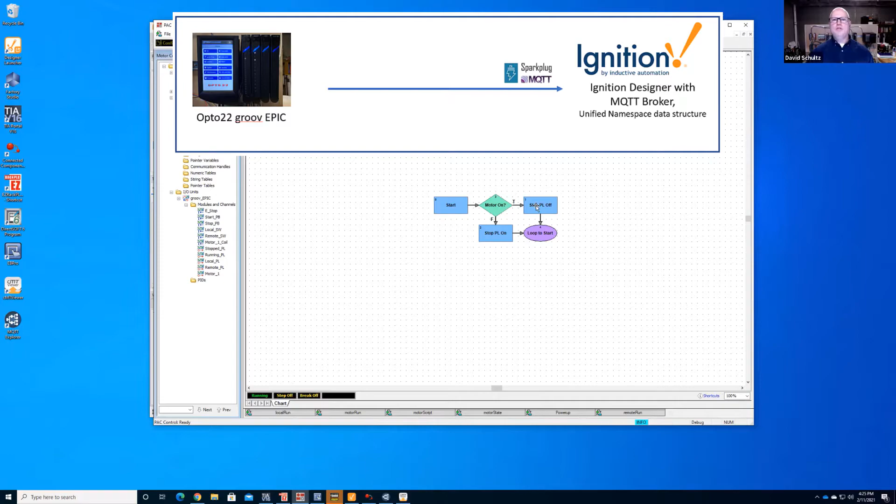Doing very well, there's a lot of good stuff going on. What have you been thinking about with Walker and all these other topics? Yeah, the Discord is almost getting to the point where it's hard to keep up with everything. A lot of good conversation, and it's almost like whoa, slow down. I was learning at a good pace, and now it's just a little crazy. I gave up a little while ago.

Right, right. One of the things I found really useful, and I think we're going to get into it here, is that for the group of people we've been working with more locally, Dan, Andrew, Mario, Dwayne, you, John, and myself, there's been a lot of learning from people with their own special areas, their niche focus. We've been learning a lot from each other, and I think that's what we're doing here with you too, where you bring a lot to the table creating demonstrations to illustrate not only the technology, but the high level concepts, the principles, the best practices we should be looking to execute in these IoT strategies and solutions.

Absolutely, and it's just a great learning experience, finding myself in a whole lot of new areas I never was in before. And a lot of it's that I couldn't, it's not like the information wasn't there, it's that someone says this is what you need to know in order to do this and focus on it. Otherwise I have no idea even where to start. So, which is cool, I like the direction.

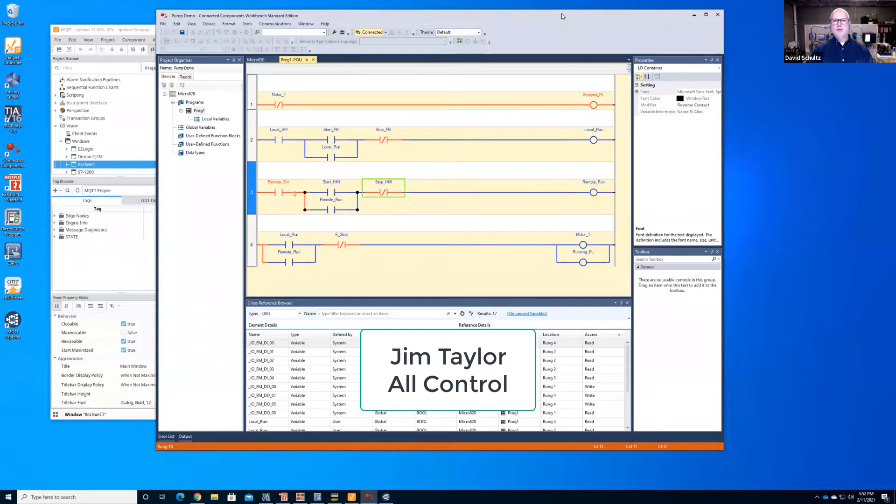He's just been extremely helpful in getting some of the stuff done. I'll explain why when we get there, because a lot of your logic control is pretty straightforward, but once you get into how they do it with their strategies and their charts, it's a little bit different. But once you understand it, it's like, oh, this is pretty cool.

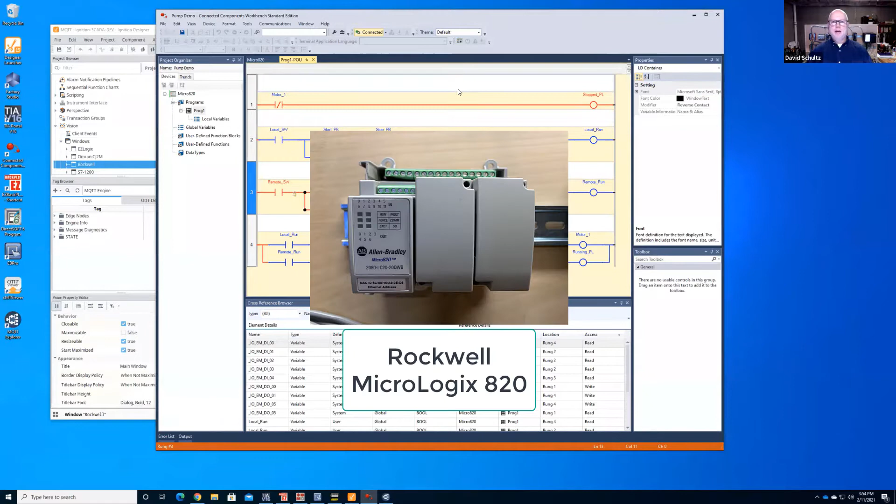So I've started here - this is a Micrologix 820. What I'm doing with this is I'm actually running a Kepware instance over here, so I'm bringing all the tags in through Kepware - it's an OPC UA server. I show this for a couple of reasons: one, there's a lot of people that use OPC and Kepware for getting tags out of their PLCs. So that's how I'm able to connect down to it.

I also want to show it because while I'm going to be publishing everything into an MQTT broker, I want to be very clear that control still needs to be at that OPC UA or directly with that hardware itself. While yes, you can do control with MQTT, it's really not recommended. I just want to be clear on that.

The other reason why I'm using Kepware is they have this neat thing called an IoT Gateway - that's actually what we're looking at, an IoT Gateway. So these are the tags that I've actually brought in. We're going from that Micrologix 820, bringing it into Kepware for publishing back out using the Kepware IoT Gateway. I'm going to get these tags publishing real fast.

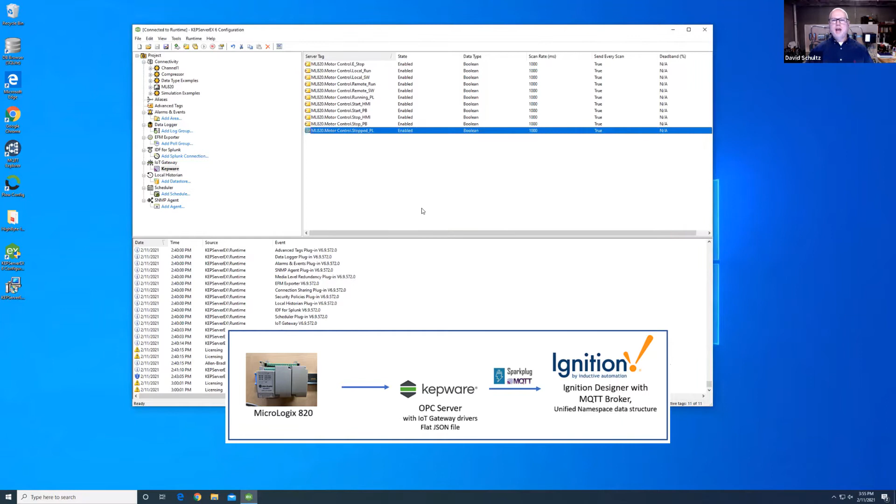What this IoT Gateway does is publish in a flat JSON. It'll take all of this information and give you the tag name, the quality, the value, and whether it's good or not. I'll show you what that looks like over here when I'm publishing it. So I'll just do a little Kepware update - now you can see here's the tag, the value, whether it's on or off, true or false, and of course the time that it came through. So you can see exactly that we are publishing all these.

I'll turn this off real fast just so we don't continue to update all that information. So now, again, it's report by exception - we're only going to publish data changes, only bringing in the data that changes through there.

So what I'm showing you here is that when you actually look at the tag that's coming in - this is coming from my fictitious Highland plant. Now it's just bringing in this utilities, compressors, and here's the motor. Let me expand this out a little bit - you can see this is a pretty good sized JSON payload that's coming through, and that's the timestamp.

So what I'm doing is bringing it in, running a Python script on this Kepware update, and anytime something changes, you'll get a tag update entry. Not as elegant as some other solutions I'll show you, but the idea is you can at least get this value published inside a unified namespace.

Again, coming down, you have your enterprise, your site, you get into the area, kind of a line, and what we're on here is just a motor in this particular case. So just one way of doing it, bringing in data, trying to make it available, and it's absolutely doable utilizing that solution.

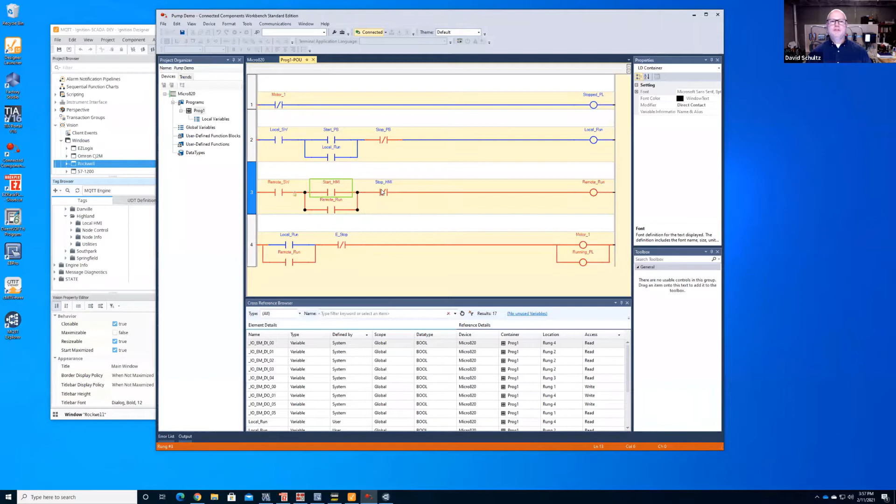So any questions on that? Oh, I guess I should show you that we can actually run this thing and turn the pump on and turn it off. So pretty slick - it's actually working.

So yeah, let me throw in a few thoughts if you don't mind. Sure. So summarizing, a Micrologix 820, and then grabbing that data with Kepware, and then sending that data to an IoT gateway.

And where was that IoT gateway again? It wasn't clear to me where it is. Is it in Kepware? It's in Kepware. And that Kepware is then publishing the flat JSON to Ignition.

So you see a lot of those tags disappeared when I just click the refresh. That's just because this is the most recent data that we have. But you can see it turned it on, it turned some stuff off, and what the status of everything is. So you can see all that.

And again, it's nice that all of a sudden, through just a JSON, you can actually keep track of how often a motor cycled through, or did a compressor start and stop, those types of things, and you get those times. You know the exact tag, on or off, and anytime it changes, this will publish that data out to the broker, and you can subscribe to it and have that data.

And so I have a couple other questions, and I want to be conscious of time so this video isn't too long for everybody. How many other samples do you have, so I know what level of questions to ask here? In terms of samples, what do you mean? Like you said, this is sample number one. I have five. Okay, are they all kind of similar to this, or are they a whole lot different?

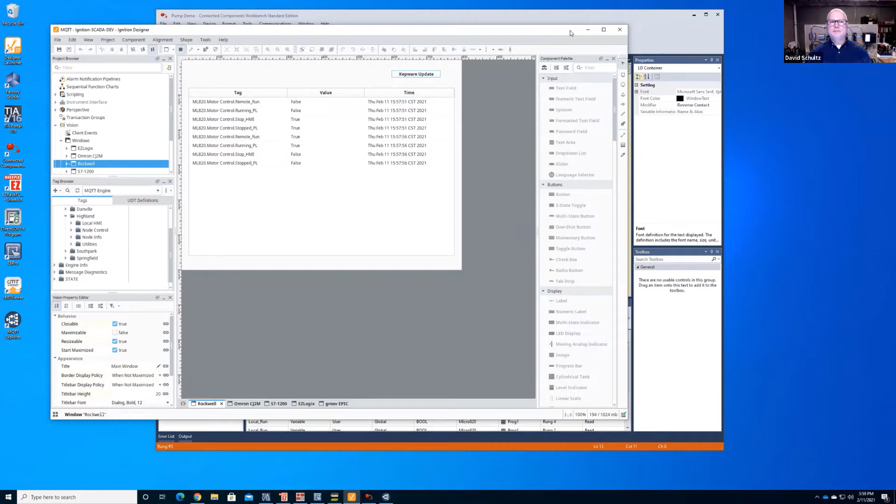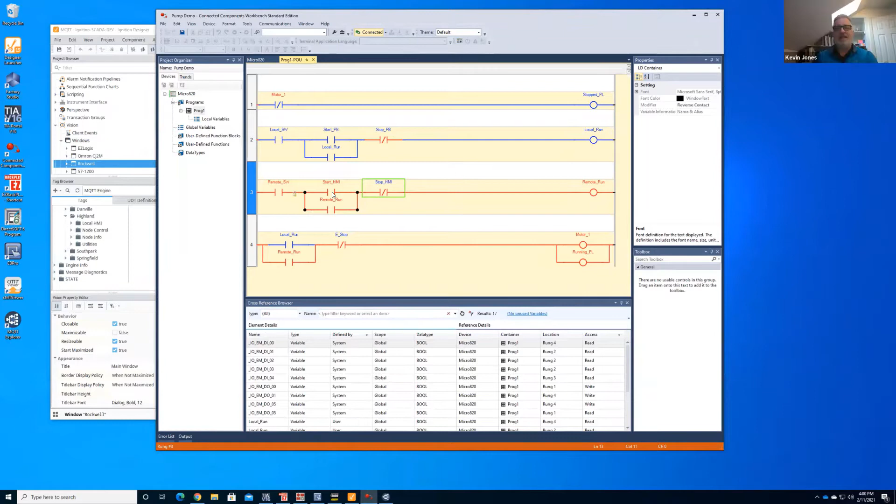Okay, so it's how. But then the overriding principle is using these principles we have around lightweight, report by exception, open technology, and of course there's always a fourth - edge driven. Thank you. And we execute using those as some of the ground rules for putting these solutions together.

Okay, all right, I'll leave more detailed questions for some other time. No worries. So let's go on to number two.

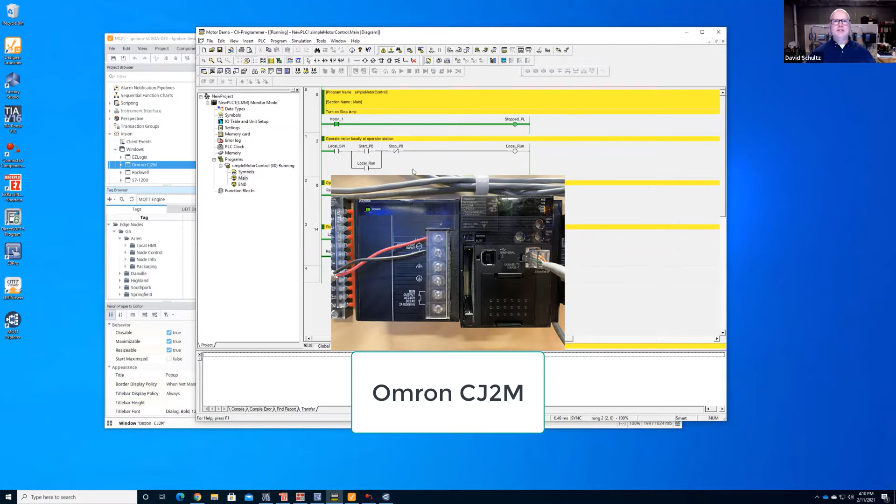So the second one we're going to look at here, Kevin, is I'm using an Omron CJ2M. This is a workhorse PLC from the Omron family, and you'll see it's got the exact same logic structure to it. So the first thing it does is the motor - if it's running or not running, it'll say that the stopped pilot light comes on.

I have the ability to do local and remote, and then of course there's the seal-in circuits that get everything to go. So you can see I can come in here, I can change it to where now the motor is going to be on.

Normally you would have just a push button that would do this. So the seal-in circuit now continues to run it. And if I want to turn it off, I can just set that back.

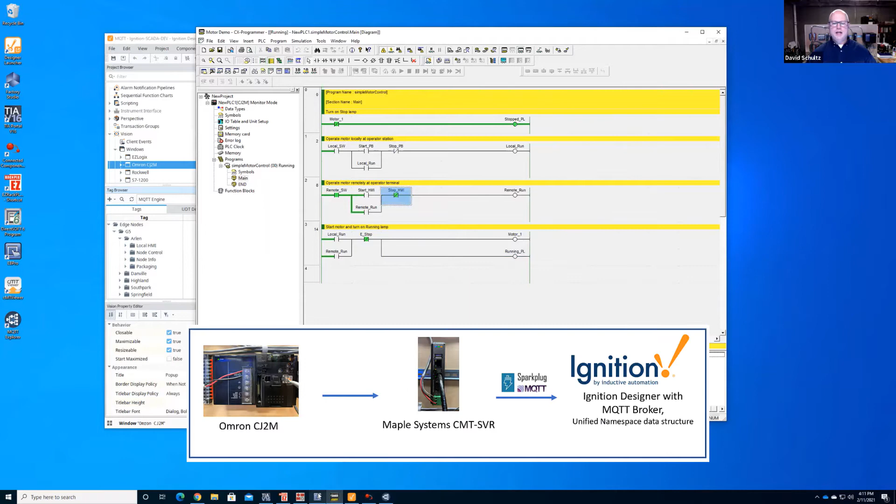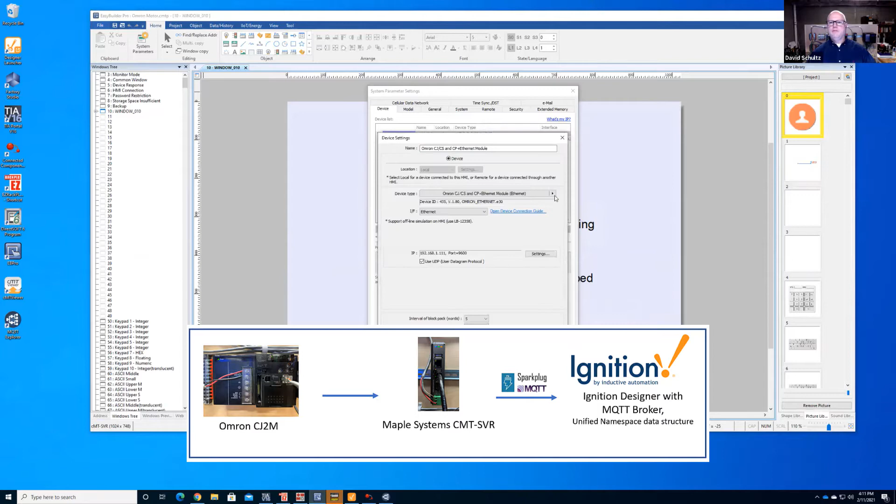What I'm going to do with this particular one is I've used a Maple Systems CMT SVR, and it has a pretty extensive list of drivers that you can use with these. So if you have a lot of old equipment, if you hit the right button, there is just a pile of drivers that it'll talk to in terms of hardware.

So again, we're going to use this Omron driver here. And then how it gets in, let's start with that first. I built a screen here that gives you some basic operations, so go ahead and do an online simulation.

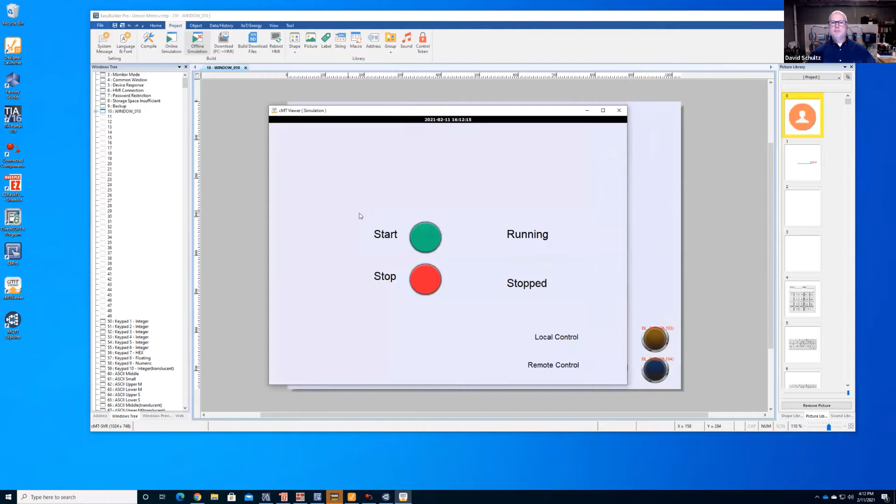As soon as that pops up, it's going to bring in all of the tags. You can see that I'm now stopped. I have the remote control, and now I can hit start, and the motor is running. It stopped. Motor stops. Pretty vanilla.

So this is a good example of using a local HMI for doing the actual control of it itself. What I was going to show you earlier was that I can also take the Maple Systems and take all those tags that are in that Omron PLC and actually publish them to MQTT.

And I'm actually using the Sparkplug-B protocol. You can see that there's all the object properties. So I'm using Sparkplug-B, sending it right to the Chariot SCADA MQTT that's right on the ignition instance that I have.

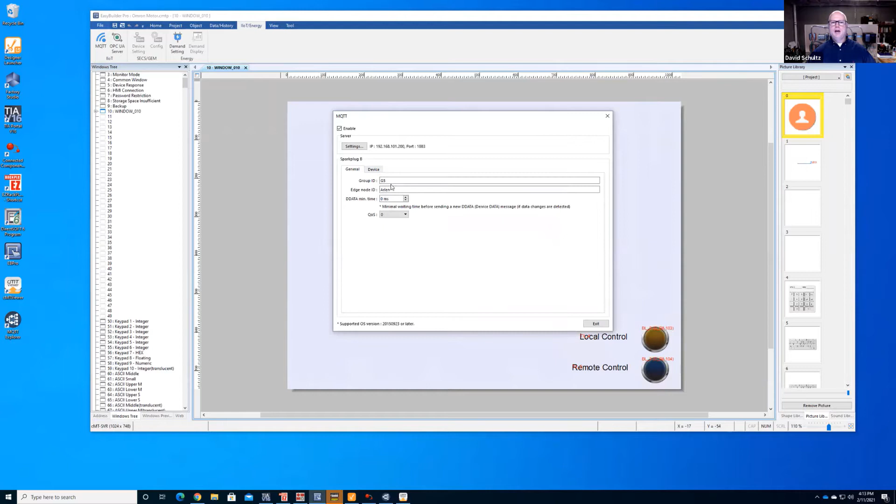And the group ID, I always use, following through the ISA 95. And then I just take all of those tags that I'm pulling from the Omron, and I'm just publishing them out there. That's all you have to do.

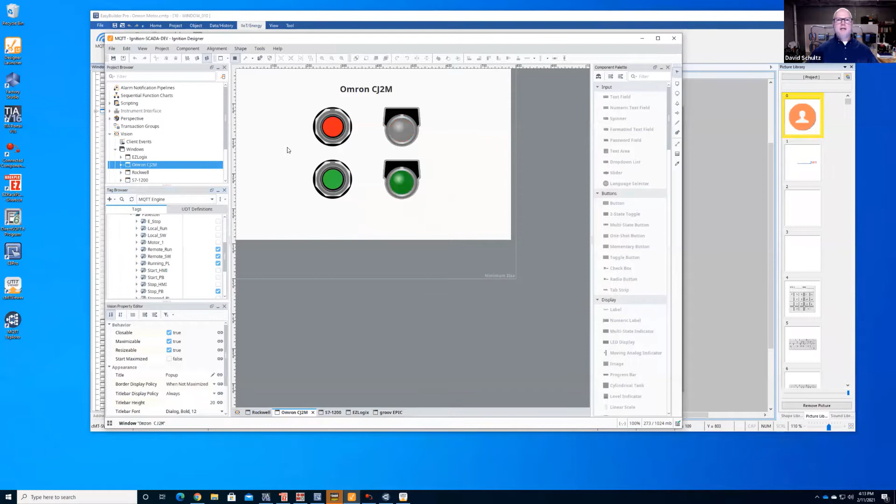So I can come over here to my ignition instance, and you can see that I have all of those tags. This is at the Arlen plant, sitting on the palletizer. I can see all those tags coming through, and I can actually go in, and even though I don't want to do control remotely, I can use that same MQTT, and I can start and stop the pump, the motor. So if you see here, I'm now running.

And if I go ahead and hit the stop, you come right back, you see that now everything is stopped. And it does keep track of every one of these.

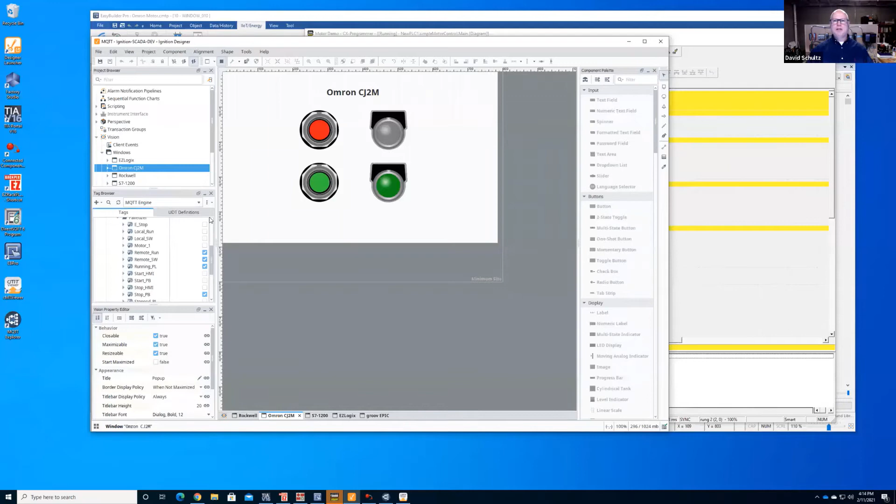So if I were to hold down the start button, you can see that I'm actually holding down that start HMI. When I release it, that tag even goes through. Some pretty neat things you can do, but you can also capture anytime somebody actually manually starts and stops it as well. So if I were to hit the actual start push button and stop push button, if it happens to be scanning at that time, I can bring that through as well.

So you're running two different HMIs, and you're controlling the one device through two different HMIs and effectively through that MQTT broker. Absolutely. Absolutely.

And the sweet thing about MQTT is it's outbound only, so I don't have to open up any ports in order to get this to work. That's just the nature of how that protocol is built. Everything is outbound only. So whenever I make a change here, my broker happens to be locally, so there would be a little bit of latency, but it'll tell it I have an update and it'll push it all the way out.

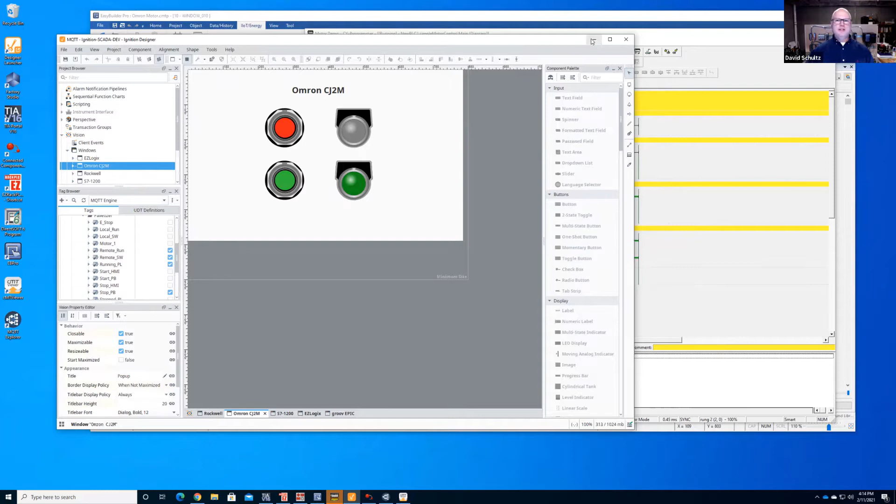Nice, nice. So of all of these, this is my favorite one, only because there's a lot of legacy equipment that Maple Systems can talk to, and I can publish it right in with Sparkplug-B. I just demonstrated this. This PLC that I'm working with has probably been in the field 25 years.

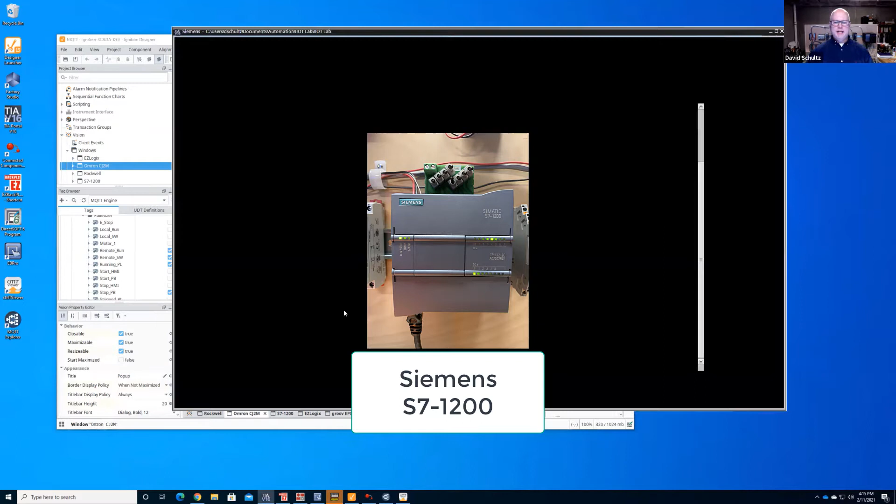So the next one I'm going to work with is a Siemens. This is a Siemens S7 1200 that I have, sitting at my Danville location. Should be a very similar setup on doing this. Right now the motor is off. I can turn on remote control.

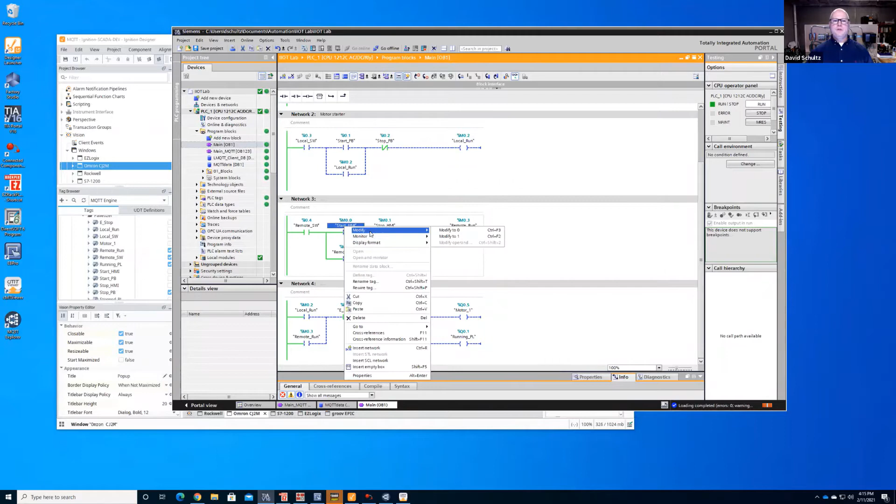I can go ahead and turn it on. So actually my PLC behind me clicked, and this would normally be just a push button. So I'd change that back, and then I can go ahead and turn everything off as well. So go ahead and get that turned back on.

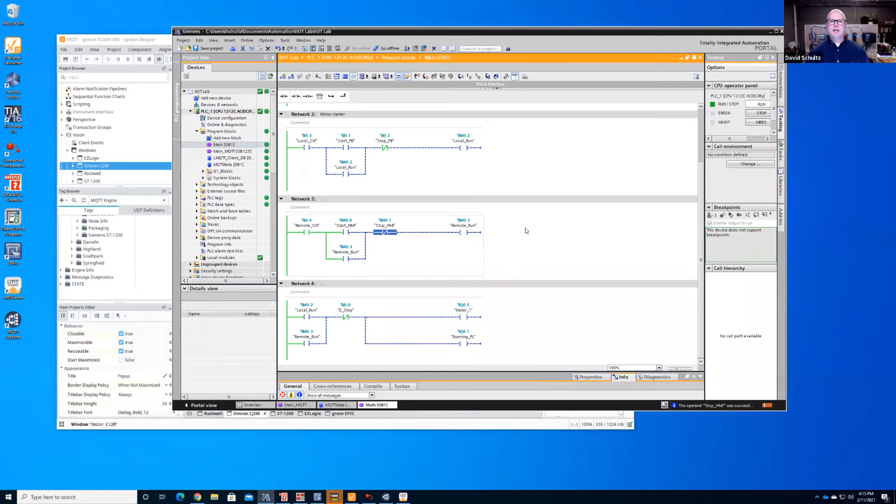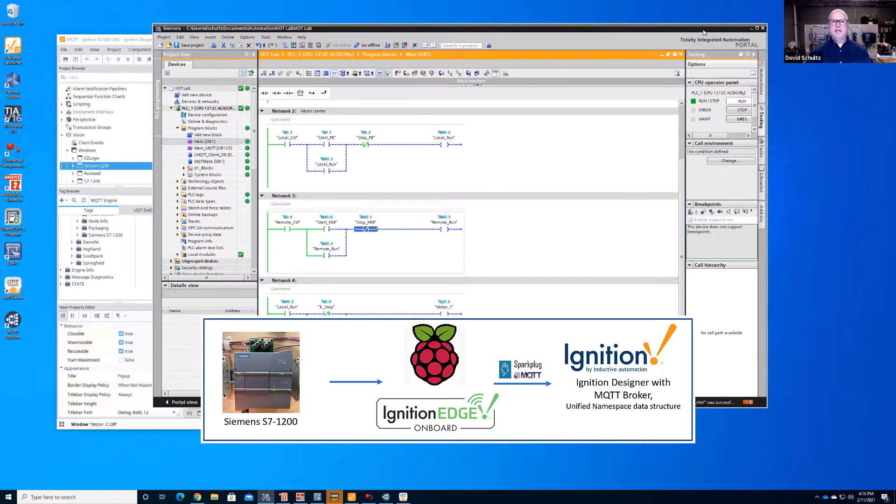So exactly the same type of thing. What I'm doing with this is I actually have an edge device, a Raspberry Pi running Ignition Edge, and I'm taking all of those tags from it and publishing that through the onboard MQTT transmitter. It's a very common way of doing these types of things, just using an edge appliance.

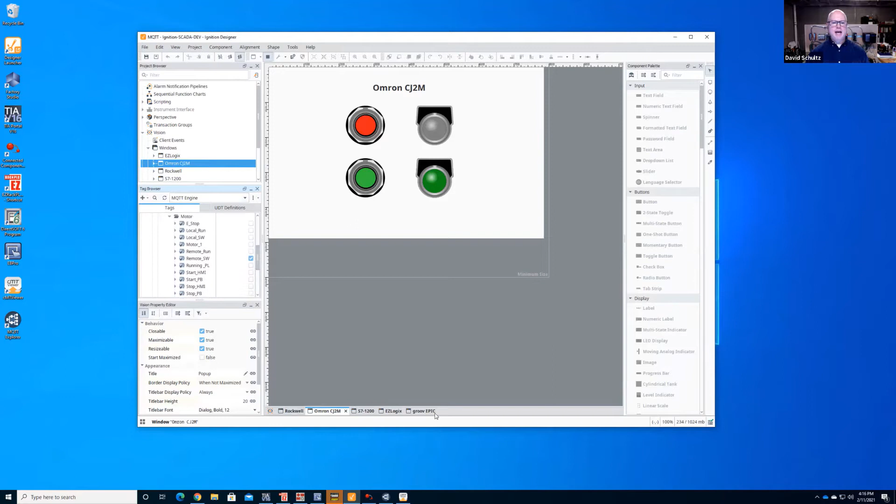You can see, just like we did in the Maple Systems, I now have all the same tags available to me, and I can do all the same motor control through there as well. So I can start it, and I can stop it, and you can see everything updates in the tags. Again, within your unified namespace, having access to all this data at one consolidated location, because all these remote locations are feeding into one area, I actually have access to all of that data going back.

So this one's pretty common in terms of just talking right to it. The S7 1200 is still a very common PLC. It's available, so there's a little more that you can do with it as well - a lot more drivers and devices that'll connect to it, not as much with say the Omron or that Micro820. The Siemens S7 does have a function block that does support MQTT.

You get 800 characters that it'll publish out, so you could go through and iterate through all your tags and build the JSON, and then you can actually publish it out, similar to what the IoT Gateway was doing in Kepware, and you can both receive on that same type of thing. But again, not as elegant as using something else. I think it's still in development, but that's available on board with the S7 1200.

So again, taking a PLC, putting it to Ignition Edge, and publishing it out via MQTT. And of course, you can develop all of the windows right there on site through that edge device as well, if that's something you need to do. So any questions on that one?

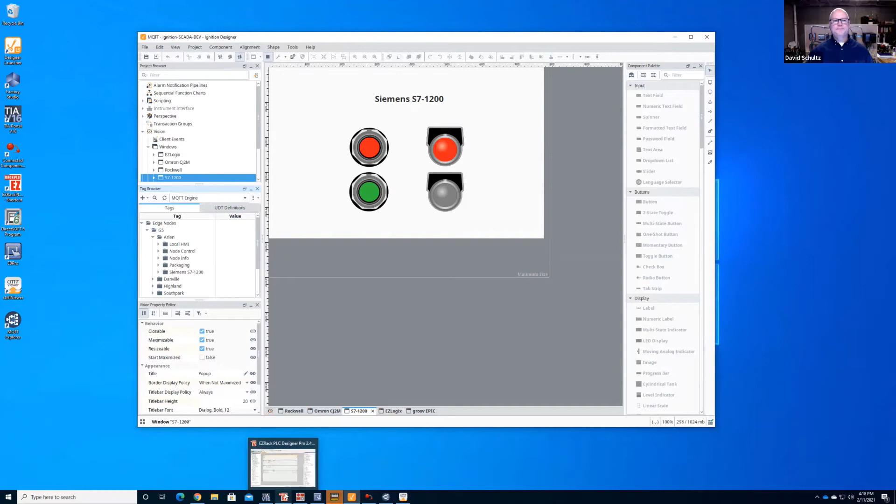No, I mean, you're repeating the same pattern in effect over and over again, just with different devices, demonstrating the different devices. So you go to Siemens S7 1200, or maybe I do have a question.

But you are also using a Raspberry Pi with Ignition Edge. So where do the two come into play as you're pushing the data out to the data broker and Ignition, and then showing that and controlling that with the HMI and Ignition?

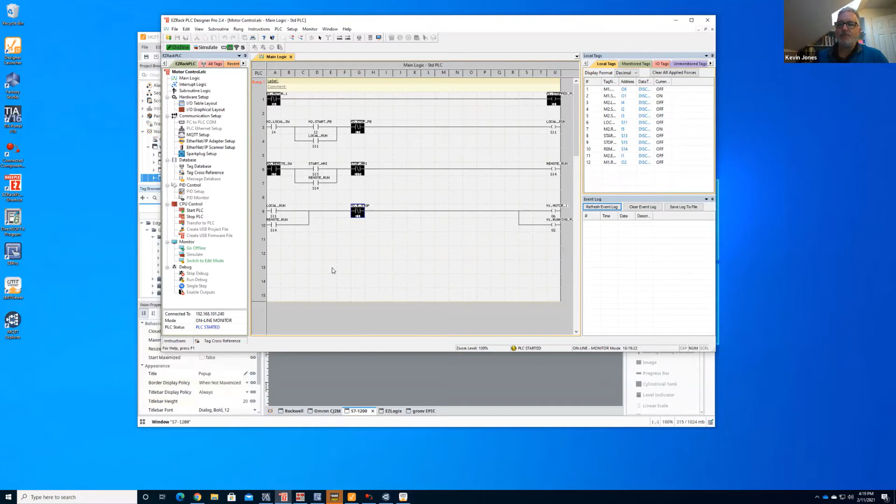So yeah, the Raspberry Pi is sitting on the same site. It's sitting right next to that S7. So architecturally speaking, it's at that remote location. I'm using a Raspberry Pi. I have the drivers within Ignition pulling the tags right out of that Siemens. And then I'm also using the MQTT transmitter and publishing those tags to an MQTT broker. So you're using the Raspberry Pi as an edge device connected to the Siemens to pull the data out of the Siemens. Yes. Yeah, thank you - that's a great clarification on that.

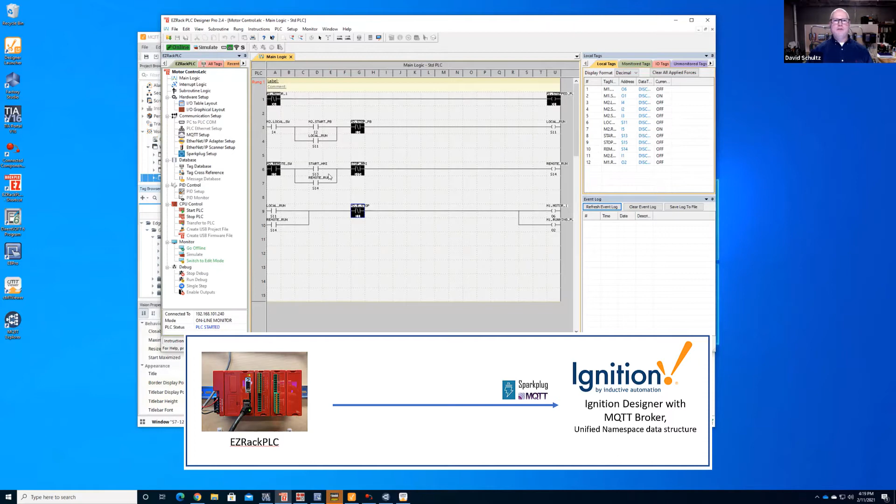So Ken, now we're looking at something that's a little different. This is definitely a piece of hardware that is Industry 4.0 ready to go, and this is an EZRackPLC, and they actually have a Sparkplug driver right on it itself. So again, Easy Logics and Easy Rack, they have both PLCs and HMIs, and you can do all the same control, there, the PLC - you need to have a local operator that's connecting through it. But what's nice, again, I don't know if I need to demonstrate the functionality.

This motor is going to do the exact same thing. But you can come right in and do your Sparkplug B setup. So you have your client ID, you give it to your unified namespace - here in the Springfield location, we're in their fermentation area. And then I set up what the brokers are, get that all set up. And then all the tags, all I have to do is publish what tags I want to do, and I can actually bring in that unified namespace exactly how it is - Tank 103 on pump 1 filling it. There's all the tags that are available to me.

So anytime I make that change, let's go over to the MQTT Broker. I can pull up the Easy Logic screen, and you can see that I can start and stop that motor. Again, the point isn't to actually do remote control for all these devices, but since I built this out properly, we're now at the Springfield location. I can come into my fermentation area, go to tank 103, go to the charge pump that's going on it, and I have all those tags available. So when I start it and stop it, it does all the same thing.

So, variation on a theme, but if you're taking a look at older technology that you'd like to replace with some new stuff, this is something you want to consider. Starting from a technology-first standpoint, we want a PLC that supports MQTT and Sparkplug B. Of course there are many other considerations, but this is something Easy Logic does automatically - you don't have to do anything with it. It's all ready to go.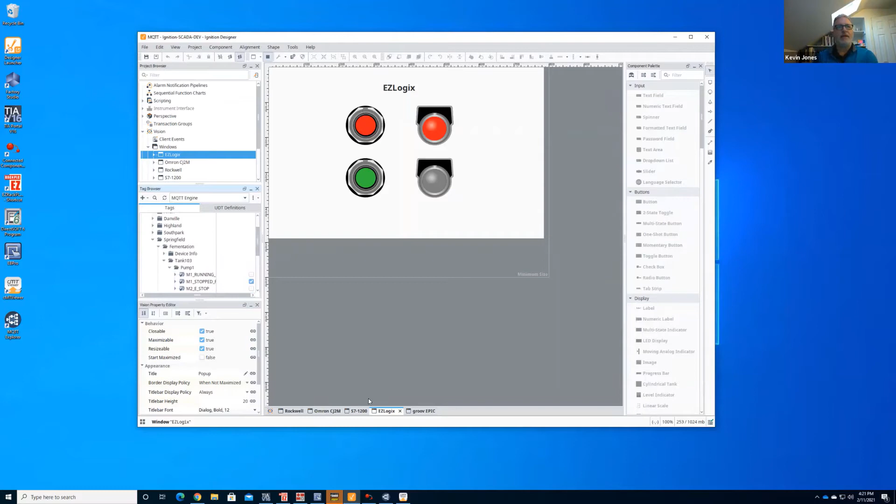So the UNS, the Unified Namespace that came out automatically, how was that created? Can you just review that? Where's the other screen you were showing? Yeah, so it's over here, when I go to my rack - the EZRack.

So when I go to my PLC setup, or my Sparkplug setup, I can bring in all the tags available to me in that PLC, and I can publish them exactly how I would want them to exist within a unified namespace, or at least how it would look in this particular instance. So where did you do this in this PLC designer, where did you set up that structure?

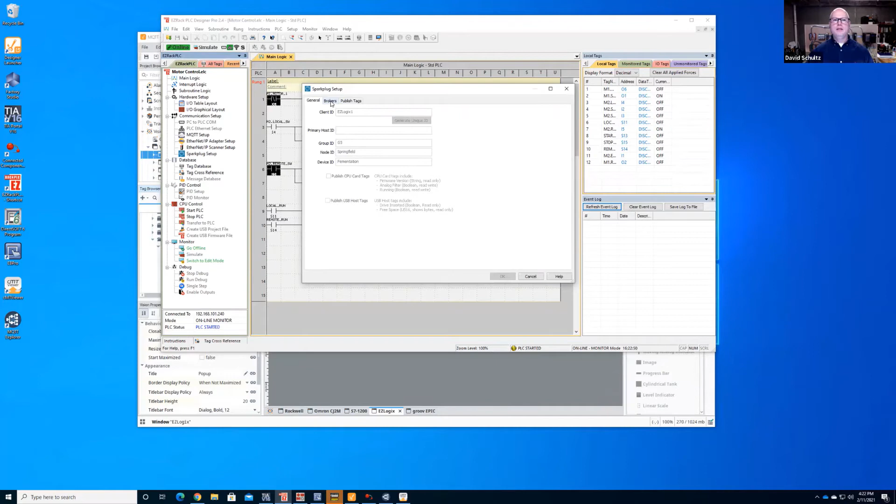So this is the development environment for the EZRack PLC, and there's one communication setup. If I go to Sparkplug B in the setup, this is where I give it the general setup - group ID, node ID, and device ID. I happen to use those three for the enterprise, site, and area. Then over where I've published the tags, it automatically fills those in, and I can even get into line and cell. So it's on tank 103 in the fermentation area, and I'm pump 1, coming into that particular tank.

That's okay. So then for each development environment, for each HMI, each development environment for the logic for the PLCs, you have to identify where you're going to put each of these components - enterprise, plant, etc. - for the UNS structure, and then put them in. It just creates it from there, and then you're pushing it.

Yeah, exactly. Now, if you were looking at a complete development environment, you might want to create your entire unified namespace for that actual location, and then just have a folder for MQTT tags, and that's where this would go. I'm really just demonstrating this to show that you can publish this data right to a unified namespace using that hierarchy that would make sense. But it's more likely you're going to build this within your plant itself and then publish that.

That's actually something we're going to take a look at in the near future - actually building one of those for a site and then publishing it into an enterprise. So we're going to take several individual MQTT clients or brokers, and publish that using a bridge connection, putting it into a cloud MQTT. Nice, great, awesome - so that's what we're going to look at.

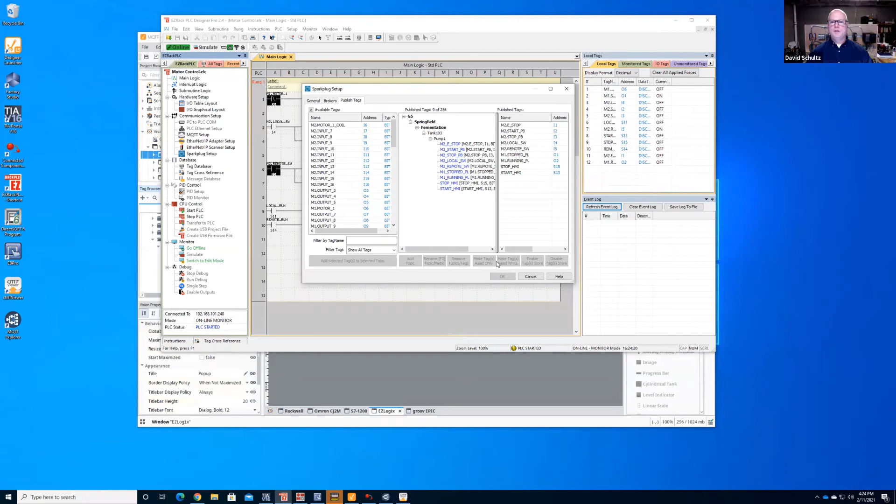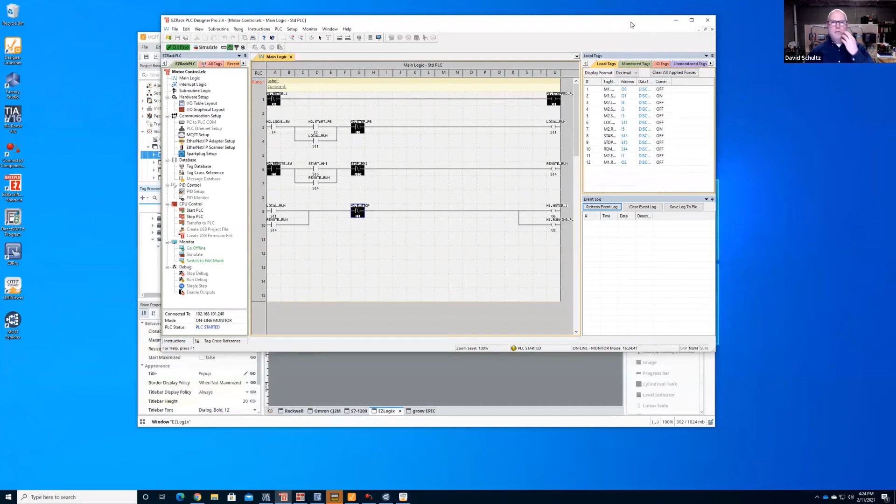So, again, just going through - we had a Rockwell PLC, put it into Kepware, went into their IoT gateway, and we just published a flat JSON. It gives us the same information. Second one we did was that Omron PLC, went into the Maple Systems SVR. We're able to do all the control there from that particular unit, as well as publish MQTT in that SparkPlug-B format, so it's available with other systems.

And then we had the Siemens S7 using a Raspberry Pi running Ignition Edge, so you can do the control right from that Edge device, and it also publishes into the MQTT broker, and you now have all that information available however you want to consume it out there.

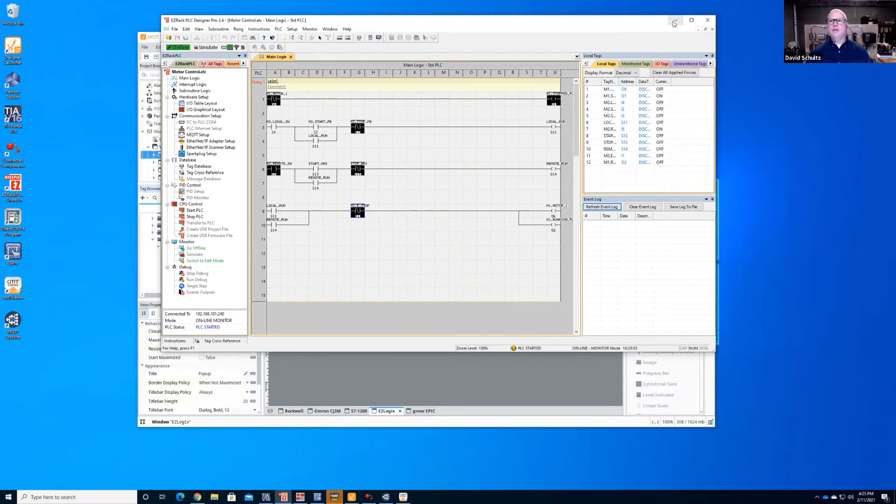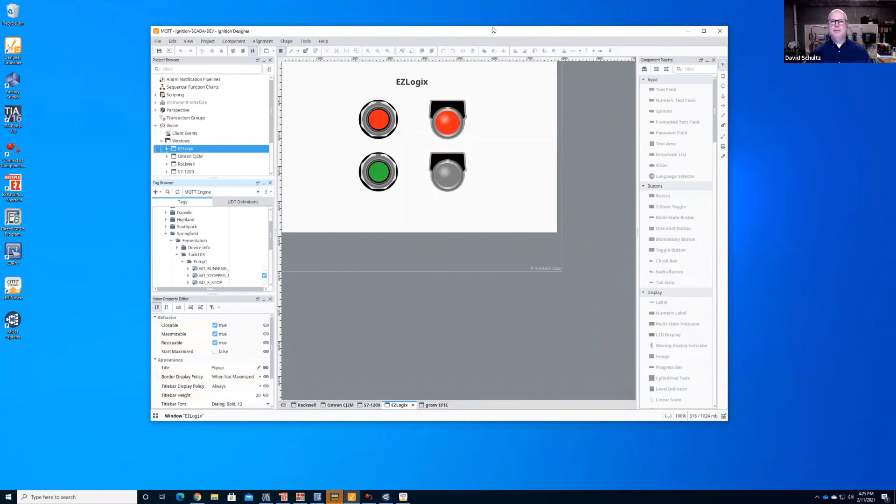And you did the EZRack PLC - then the EZLogix the one we just visited here. This actually has SparkPlug-B built into it, so I don't have to do anything. I just build my project, and then I am off to the races. I can take all those tags and publish them right out if that's how I choose to do it. So they're pretty darned inexpensive too - something we want to take a look at, functionally speaking.

All right, so now we're going to come to the Opto 22, the groov EPIC. What is fundamentally different about how they do their programming is that instead of using ladder logic, they create these strategies, and then they create these charts. A chart is just a visual flow diagram of the logic you want to run through. Every chart starts with this power up chart that just starts everything, and then you give it the next signal, the next flow, to go ahead and start the charts.

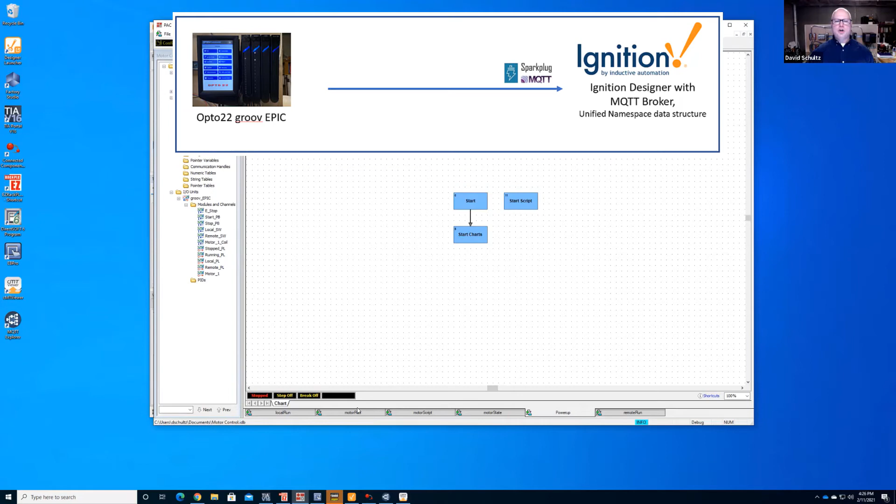So what I've built here is that I've broken down each of those rungs that existed in the other PLC programs. It's running all of these charts at the same time. The first thing it's going to do, if the chart is going to start, is check to see if the motor's on. If it is, I'm going to turn the pilot light off. If it's not running, I'm going to turn the pilot light on, and it's just going to continue to run this particular chart. Next thing it's going to look for is it's going to start the chart.

It's going to see, am I in local mode? And then you can just follow it through. If it is, it turns the local PL on, or it'll turn the local pilot light off. Then it's going to look for the stop push button, look for the start push button, and it's just going to continue to loop through that exact same scenario.

Remote is the exact same thing, but instead of looking for an actual IO change, it's going to come in and look to see if the IO changed for that. Are we in a remote operation? Then I can start and stop it with an HMI, and it'll do the logic there. It'll solve for that and just reiterate it.

And then finally, using that same bottom rung with all the seal in, it's now going to say, can I run the motor? Meaning, is one of these states true on the others? Is it time to run the motor? Before it does anything, it's also going to check to make sure my e-stop is off. Is that emergency stop there? Otherwise, it'll turn the motor on, and it turns on the running pilot light as well, and it'll just continue to run this flow as well.

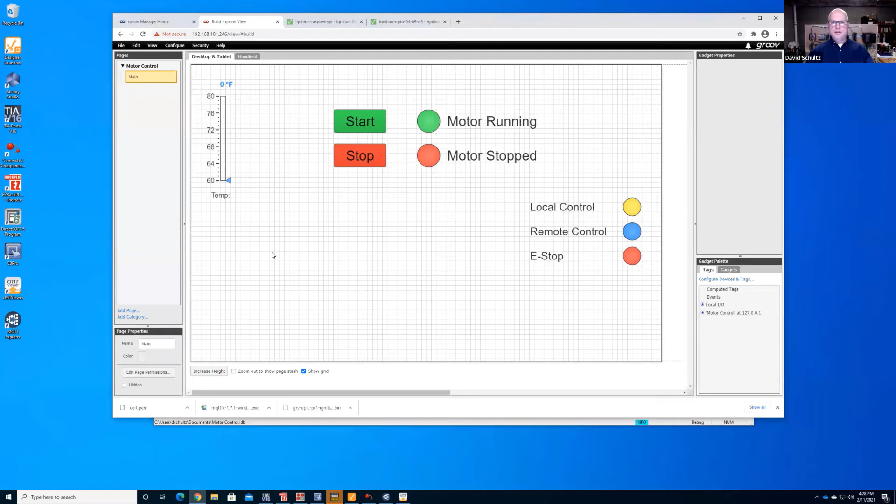So we're going to go ahead and start the groov View itself. You can see I have all the exact same lights that you would expect to see here, but I actually have this wired into some RO or to some IO. So we're actually going to show that I can turn this on, and I now have local control. You can see that my yellow light is on my controller.

I can take the green button, I can start the motor, and now you notice that the light changes. It's still in local control. Now I do have a blue button for shut off because I didn't have all the ones that are there, so I can stop the motor as well. And then of course I do have the e-stop, so we'll go ahead. Not as easy to do with two hands, but I can actually get the motor stopped as well. So I can get that all the way in. Now the motor's stopped.

So can you juggle a mouse, a computer, and input devices? How much can you do?

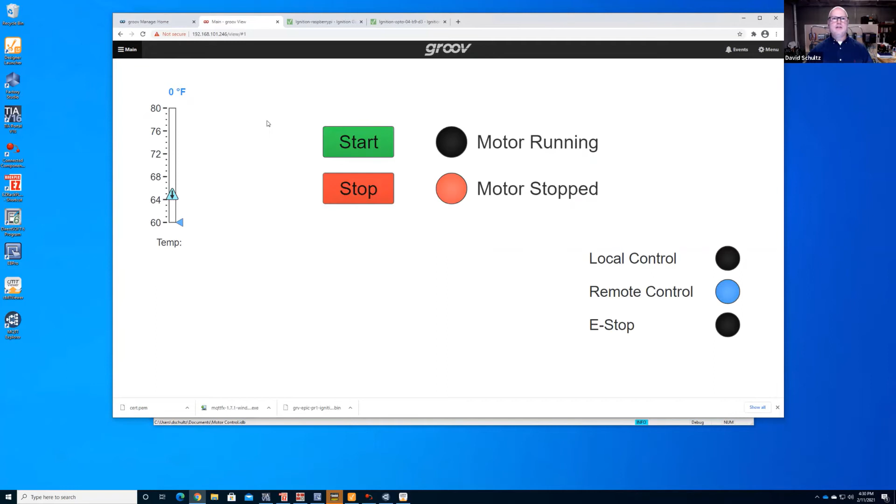That is really cool. You're doing a lot of really, really nice stuff with this.

Yeah, so if that wasn't enough for you, remember we talked about doing Node Red? But wait, there's more. So you have Node Red you can do this in. I didn't build any of the flows, but I'm just demonstrating that you can do stuff with all of this. It does have all those same Epic inputs down here, so all the Opto 22, you can pull in all of that IO that you want to use utilizing Node Red. But if that wasn't enough for you, it also has a built-in ignition instance.

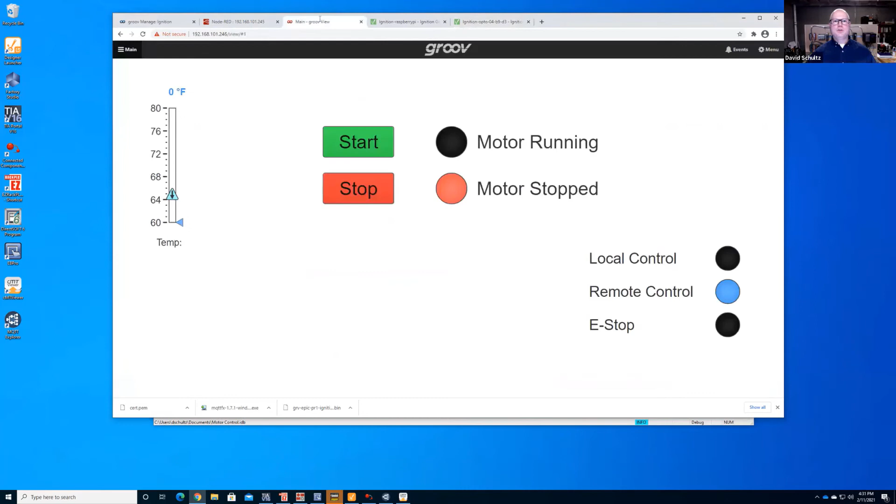And so we have a set of knives for you. Yeah, so it has onboard ignition where I can actually develop this particular project, taking all that IO and all those variables, and there's a driver that it brings in similar to it, so I can actually do all this remotely as well.

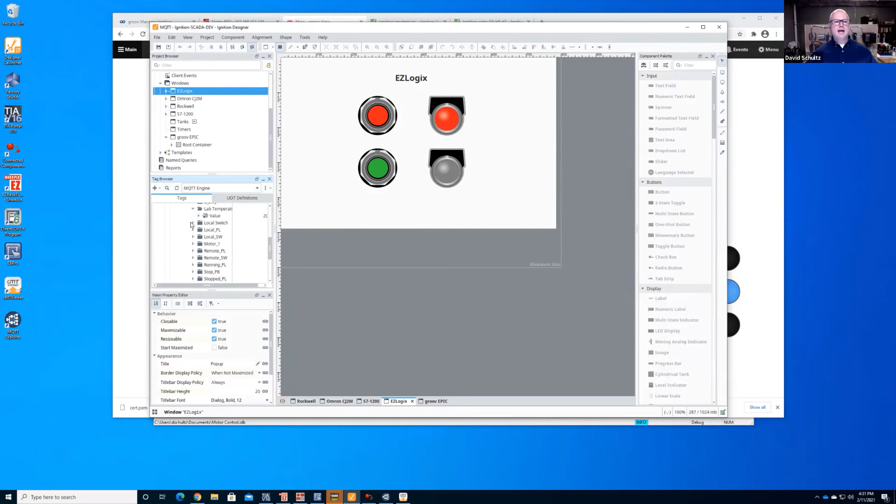So I can come over here to my project, and again, here's my groov EPIC, and there's actually a couple of ways that this has come in. Let me get to - so this is at the South Park location. I pretended this is a refinery, so we're out in the alkylation unit. I'm actually using the Opto MMP, so this is all onboard. You have all the channels. You can see all your e-stop and all your pilot light. Let me move this over a little bit so you can see lab temperature - it's 20.3 degrees C in here, and you can expand out all the same IO that's there.

And then of course I did create another connection into the actual PAC configuration. I'm bringing in all that logic and that control, so you can see I have all the same kind of data that's coming into it as well. So again, as you would expect, I can come in here, I can start it.

And now it's not going to work for me yet - oh, I need to run the strategy. All right, it's back on. Well, this was working great earlier, and I'm not sure why it's not, but nonetheless, we get the idea.

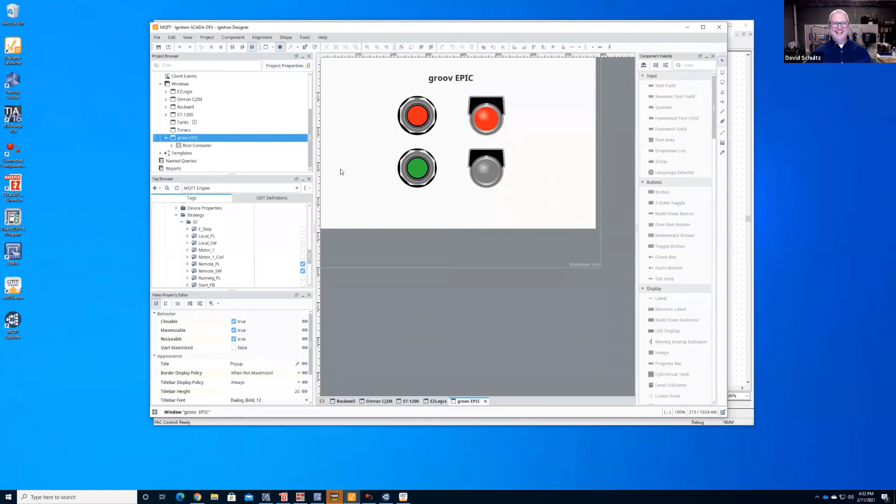So again, the whole point is that here's how you teach an old dog new tricks. Here's how you take some existing hardware that's out on your manufacturing site or even remote. There's several different ways that you can connect everything together, and then you can bring it into a unified namespace. We now have access to all that data, again using all the core principles of the open architecture, lightweight, report by exception, edge driven, and all of this information is there.

Yeah, again, like I said at the beginning, I really like the idea that we're using these newer principles for creating really good IoT strategies and solutions for a lot of the flexibility, scalability, for getting that one version of the truth out to everybody for that visibility into the plant. And at the same time, you're enabling this with existing technologies.

That's something we're working with for some clients right now, where they've got 4 or 5 different models of Rockwell Automation PLCs, and RSLogix/RSLinx isn't cutting it anymore. We need to at least replace that with Kepware to pull the data out and push it into HighByte and an MQTT broker to really get the data where it needs to be, and that's going to save us a ton of time versus older technologies.

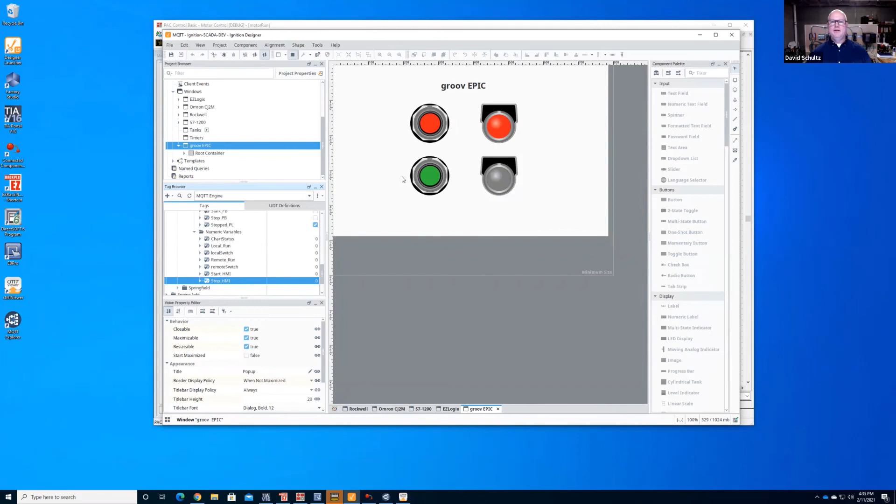So I am able to control this thing just by manipulating the tag value itself. Apparently there's a little action item behind that tag, even though I had set it up and it was doing its thing, something has changed since then. So yeah, a lot of different stuff we can do here.

I guess there's one other thing on this groov that I wanted to show you. But wait, there's more. Yeah, but wait, there's more.

So I mentioned Ignition — there's an MQTT broker built right into it as well, so that's where we're getting all the payloads. Similar to the EZLogix, you're able to publish right to it. And of course it also has CODESYS, so if you wanted to use CODESYS to do all this, it supports that as well. I haven't done anything with it, just pointing out that it's there. So it's just another way of doing it.

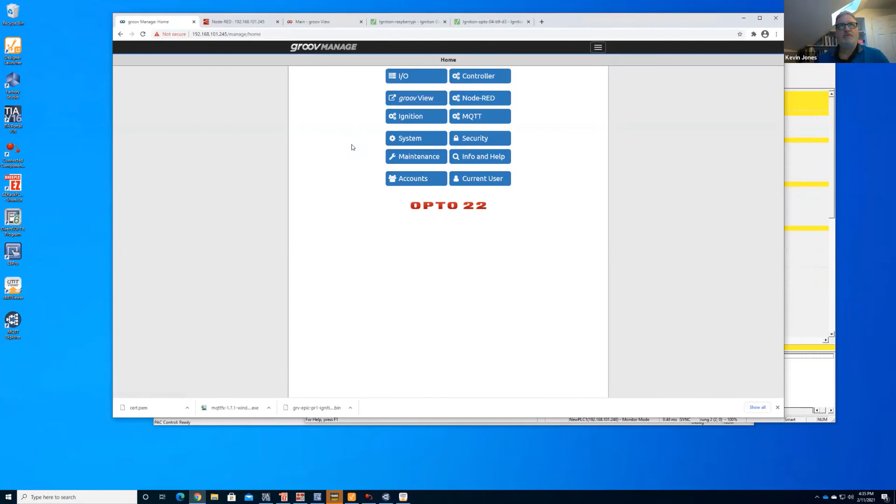So the groov device has an actual MQTT broker inside this device that's at the edge, so to speak. Yeah, absolutely. Getting back to that idea of the flexibility of brokers, you can have them at the edge, on the line, at the plant, at the enterprise, and they can all publish — it's all based on whatever kind of problems you're trying to solve as to which ones you set up.

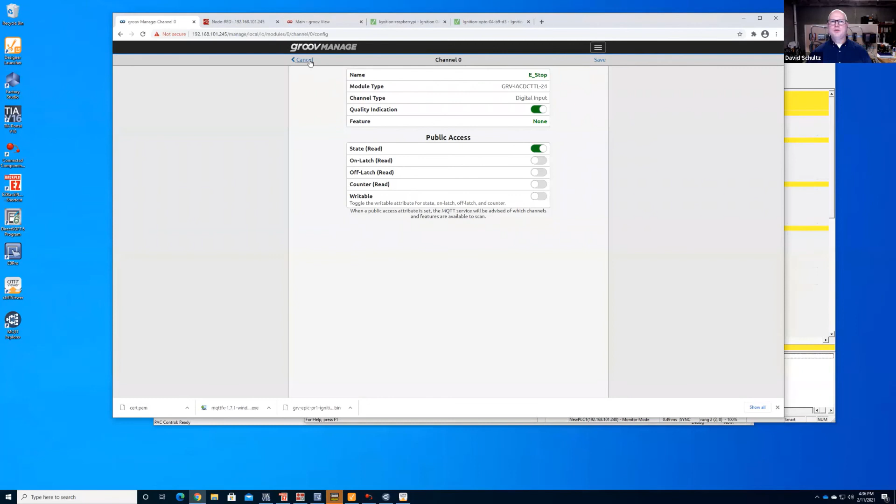You just have to say, do I want public access to it or not? You say yep, I do, and then it just publishes it right out. And of course I like it because it's got a wiring diagram built right in, so when you're going to wire everything, it's pretty slick. Just a lot of functionality and flexibility to it, and it's actually priced pretty competitively relative to other PLCs available on the market.

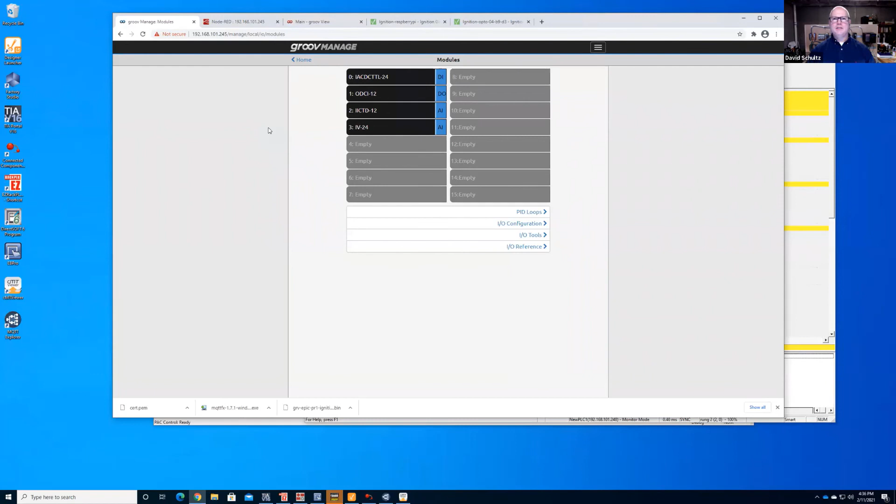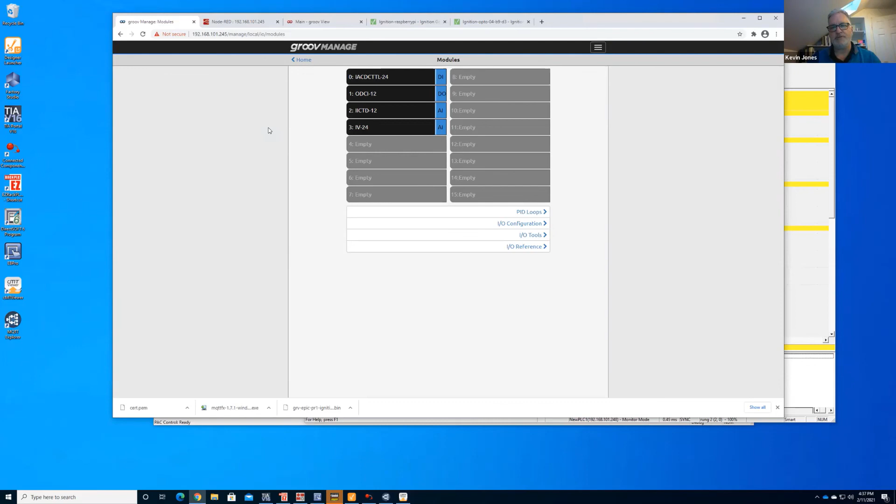So a lot of different ways we can do something, but you don't have to get rid of your existing hardware — you can already use what's there. But if you decide, yes, technically speaking we're due for an upgrade, these are some things you should consider. Amazing flexibility, and this is also the kind of solution you can implement incrementally. You don't have to do all of this for all of your PLCs and devices — just do a couple, do an area, a style, a line, and then more later.

So going back to this Omron one, we're just going to start with one machine. There's a whole different program that runs with it, but all we're having to do is plug in this Maple Systems — we're going to use an SVR, it's actually a 200. It's got Wi-Fi built into it, but it'll connect right into that Omron PLC, pull the tags, and now they'll be able to remotely pull some data off of their machines and see what's going on. So that's what we're doing there.

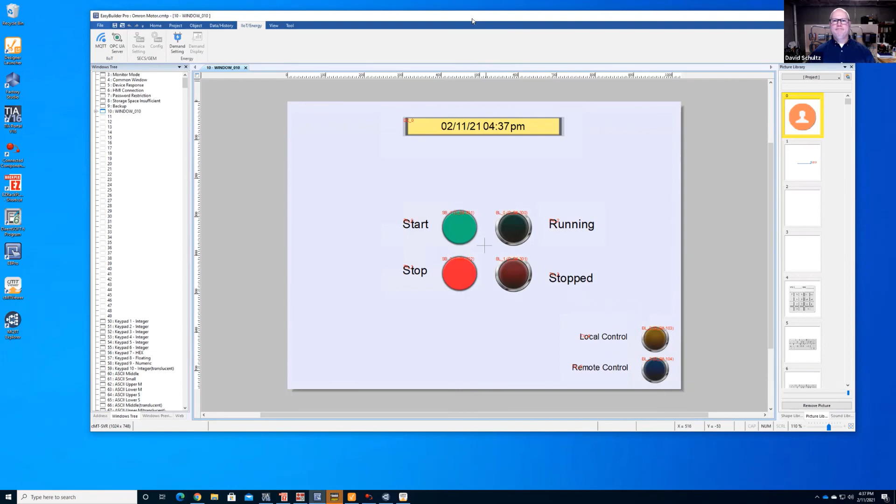But it's $300. Wow, priced right. Crazy levels of flexibility. Absolutely. Scale for the future. Good stuff. Wow, anything else? Come on, don't you have something else? Yeah, no, I think that's pretty well it. That's enough. Yeah, I think it's enough. Definitely is enough. I hope it's enough. It's plenty, it's more than enough.

So you've gone through five examples, and as you said, just demonstrated how to pull the data out of older devices into the new architecture, following these strong principles for IoT strategies and best practices. Yeah, awesome, great stuff, Dave. Great stuff.